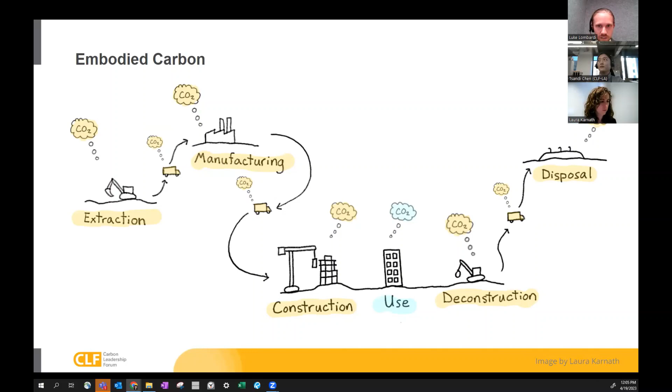Our first speaker is going to be Marcus Hopper. He's an influential figure in his role as the Northwest Regional Design Management Leader at Gensler in San Francisco. In 2018, he was part of a research team that aimed to bring awareness to the circular economy and identify how the industry can bolster a reuse process within design work. Findings were published in the Gensler Research Institute white paper, What is Old is New Again, Circumnavigating the Circular Economy. He's also a prominent member of the All for Reuse group.

Then we got Daniel Kietzer, who is ecosystem growth leader at Rheaply. He's based in Austin, joining us today from DC. He has over 10 years of experience in both the for-profit and nonprofit sectors, designing and leading impact-focused circular economy and sustainability programs. At Rheaply, he's working to scale their online material marketplace around the country, including Texas, Tennessee, Michigan, Ohio, Washington, and soon to launch in San Francisco and the Bay Area, which is really exciting. Rheaply is also partnered with numerous local municipalities and doing work at the federal level in DC, all around circular economy principles in the built environment.

Okay, everyone close their eyes while I get my screen shared. Let's see here. Oh, hey Luke, I think you have to stop sharing for me to share. Okay, there we go, thank you. Alright, a few more minutes. Okay, is everybody seeing the presentation screen, Luke? We just see the PowerPoint. Looks good, perfect, okay great. Alright, hi everybody, thank you for inviting me. I think you need to go full screen, by the way. Oh yeah, you're not seeing it? We see a PowerPoint full window, not the full screen. Okay, this should work, do you see it now? Yep, perfect, okay great, got it to work.

Well, thank you everybody for having me join this webinar. I'm really, really honored to be here with Daniel, Luke, and Jorie. I'm going to set the stage, and I'll go through this really high level. It's not going to get into the specifics because I think this group is well educated around embodied carbon. But I'm going to set the stage specifically around material reuse, and then some of the things that we've been doing here with others in the Bay Area. So I'll just start.

Just waiting for this delay. Try to switch the screen. Let's see if I can do this way.

I think the first thing I want to start with is a quote from one of my colleagues at All for Reuse. If you don't know about allforreuse.org, look us up. We're a bunch of design professionals and construction folks looking at how to change how building material reuse is viewed. One quote that Andrew Ellsworth from Doors Unhinged made was that building material reuse is really where carbon and waste meet—it's this really interesting intersection.

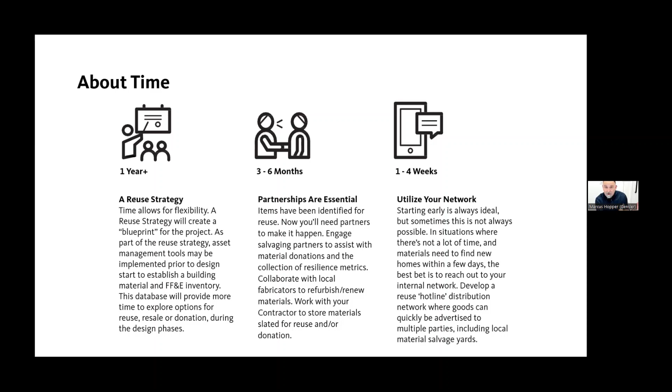The 1 to 4 week time frame is really this kind of hotline. During the twists and turns of the process, you're going to have your hotline of folks you call. It's not always going to be perfect. Even the most perfect reuse strategy or blueprint may have some holes, and that network you develop through your partnership list will be essential as you navigate and move through the process.

Working together in the Bay Area, we've developed an alliance, the All for Reuse Alliance. This has been a group of folks coming to the table from all different perspectives. We have folks from the Department of the Environment speaking from a policy side in San Francisco, folks like myself in the design industry, people coming from construction, and people from the public sector.

It's been a really interesting conversation about how each of these pieces plays a part in this overall ecosystem. So there are really three things the group is looking at: environmental impact, like where can we reduce carbon and waste; the enterprises piece, the workforce, can this generate jobs and where; and then we're also looking at scaling it up.

When people think about material reuse, maybe in the past it's more like, hey, we're going to put some reclaimed wood on a wall - that's great, it's more of a finished material. We're looking at scaling it up to the point where it just becomes a normal thing that we use in our projects.

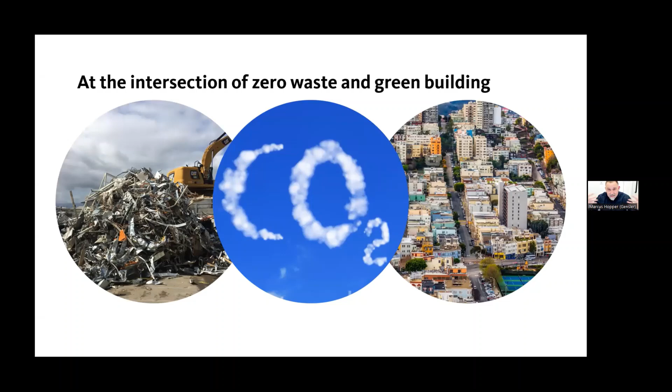Talking with the City of San Francisco, the Department of the Environment has also been looking at this from a policy side. There's this interesting intersection, similar to what Andrew had talked about in his quote, between waste and green building - that's where carbon meets in the middle.

So they started looking at this as a city, as their Department of the Environment, because they are looking at developing policy. Policy is going to be key in moving some of this forward, creating those incentives. So they started to look at the system, where can we start to intervene in the typical traditional system. What we're showing here comes from the Department of the Environment, the typical process.

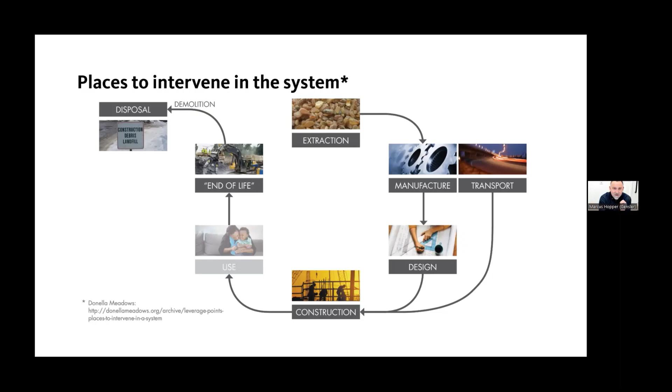The extraction, manufacturing, it goes into design, we're specifying, it goes into construction, into end of life, disposal. And so they started to kind of spider web it, right? It's like the crazy person with the pins on the wall and the yarn, and they're kind of connecting all the pieces.

And so they started to look at areas in this kind of workflow where they could intervene, like where could we start to pull apart and stick in things that can help with this material reuse idea. So what we were asked to do early last year, Gensler, we were joined by the Reuse People.

Which is a local nonprofit. Madrone is a demolition contractor focusing on sustainable demolition, and Stop Waste. We were asked to really focus on this recovery resale piece. Let's just look at the materials that are coming out. How can we start to create the demand there?

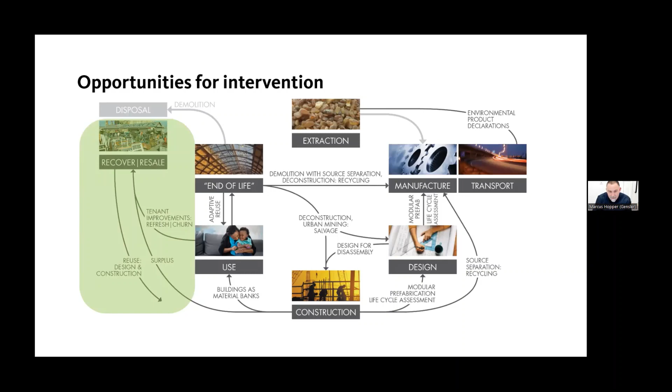The city needs this for policy, right? As they develop policy, they have to complete the whole picture. Before you put policy out in the world, you have to have somewhat of an operating system for it to be successful. And so they're looking at developing this network for suppliers and receivers, making that public to the folks using it within the jurisdiction.

The virtual asset management piece, which Daniel will talk about in a minute, and then this physical laydown space—where do the materials go? They can't always be just-in-time, stored on site. When purchased, they may have to go somewhere, like in escrow. Where do they go?

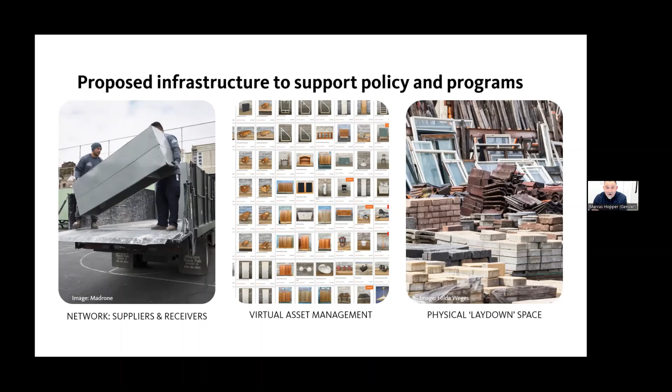The virtual exchange is very important, and I won't get into too much depth because Daniel's here to talk about this, but this is really the first step. It's like just creating visibility, showing people what's out there—what are all the materials that are currently existing out there, making it visible.

The next piece is really where our team dove into. This was an 8-week study, really, really fast. Really looking at the actual storage of it—the materials, and where are they going to go. How would this work?

And so this tied into a larger concept that the city was talking about and working on, called the Building Resources Innovation Center, or BRIC. The vision of it is really simple. It's really looking at this kind of flexible system—a system that can be relocated, a system that can be replicated—that can really enhance the building material reuse within the commercial construction market.

And so the concept is really 3 parts, right? We're really looking at trying to streamline the process—where can we help push it forward. Looking at how these sites or this system could really benefit the local community. Building material reuse is really local, and so there could be opportunities to help local communities.

This system—specifically in San Francisco, or anywhere in California—real estate's expensive. And so how do you design this system so that it can be, again, relocatable? Can it be designed around disassembly? It's there today, can be picked up and moved somewhere else.

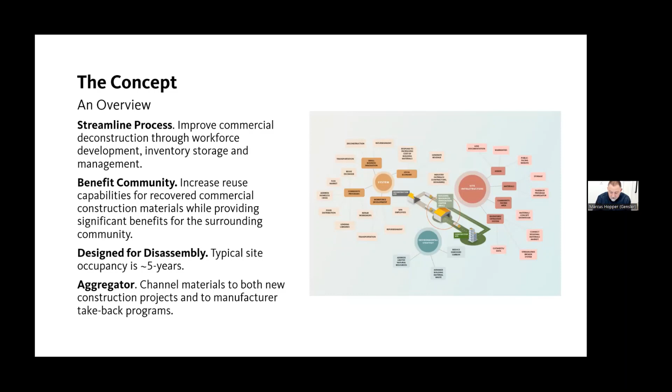It's based on a kit of parts, right? So the system would have 3 main parts. Site operations, which is kind of the heart of each site. Material storage, which is designed on a module—a module of a pallet and the clearances for a forklift. It would be weather protected. And then the community-facing piece, which is essentially the thing that makes each site very specific, because there are going to be various sites throughout, specific to each locality.

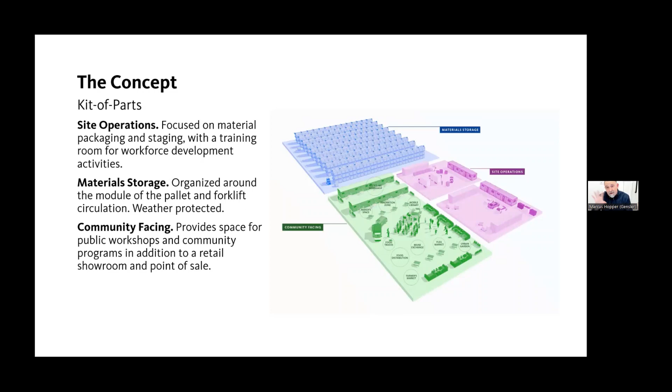So if we dive into the first part, which is site operations, this is kind of the mission control, right? This is like the home base. This is where stuff gets done. It has to be super functional, right? This is where the site operator, who is really running a business, will oversee this specific site.

We talked about the aggregators. So going back to functionality, it's a site that has enough layout space so when things are coming in, there's space for them to start to move the materials around. It's either going back to a take back program to go back to a manufacturer, moving to the retail side of the site, or going to a donation stream.

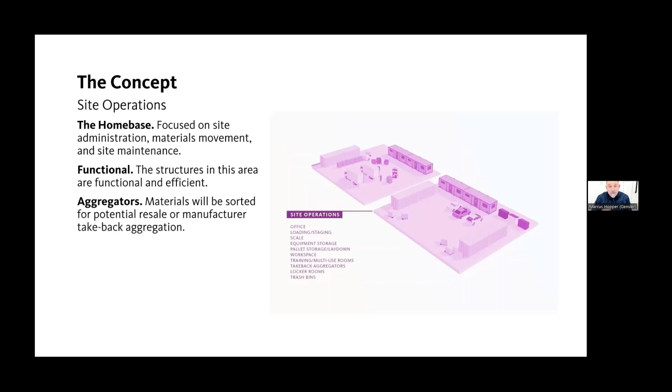The concept around material storage is interesting because every site would be slightly different, right? They're not all going to be the same site, size or shape. So really looking at this by material. When we studied this last year, we looked at materials coming out of commercial interior projects over the past 10 years. We went 10 years back. And so these materials listed here, starting with carpet, going all the way to ceiling tile, these are the top 9 materials that were coming out of projects.

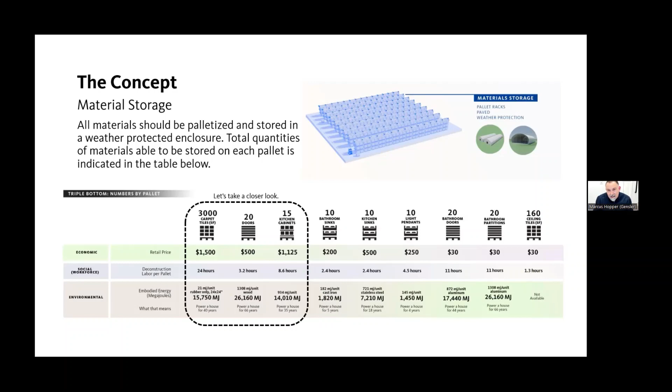So our team created almost a value matrix, looking at it through different lenses: economic, social, and environmental. We can take a closer look at those first 3, and I can dive into it a little deeper. As we look at the sites, say you're a site operator looking at what's the ROI on the site, how is it going to pay off. With a specific size of site, you're going to need to look at the materials from these 3 lenses.

On the economic side, take carpet tile, for instance, which is the first one. 3,000 carpet tiles stack, they're easily storable in a smaller square footage of area. From an economic standpoint, they could roughly bring in about $1,500. You have some labor hours associated with that. There's a lot of pieces and parts, so there's going to be more labor hours generated from that, which would be great. You're going to create more workable hours for people for employment.

And then in terms of the environmental piece, and this was all calculated by Ted Reiff at The ReUse People, in terms of embodied energy, you're getting almost 16,000 megajoules. So you can look at carpet tile, that's how much I'm going to get in terms of a retail side. I have a good number in terms of workable hours that I can employ somebody, and then I have a good kind of environmental impact.

If we move down the notch to doors, you're going to get less on a pallet, right? About 20 doors. In terms of value, about $25 a door for reuse. The workable hours in terms of folks on site—this doesn't incorporate the deconstruction piece from the site they're coming from, it's really just the number of hours on site—it's a lot less. The environmental impact, though, is much higher, right?

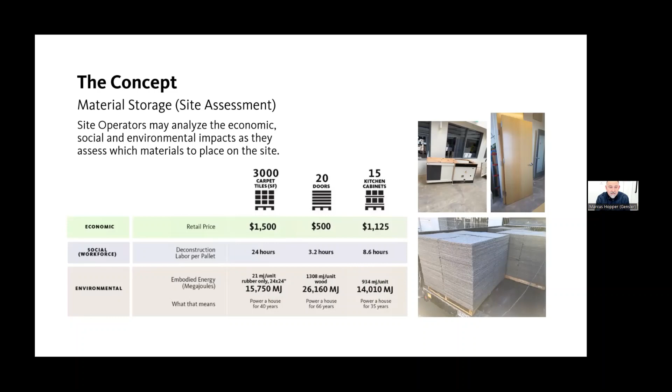The last piece was that community-facing piece, right? This is really important because every site being different, this is really how each site kind of shows its individual flavor. It's going to be the front door of every site. This takes it beyond kind of a material transfer station. This really becomes like the social side of materials.

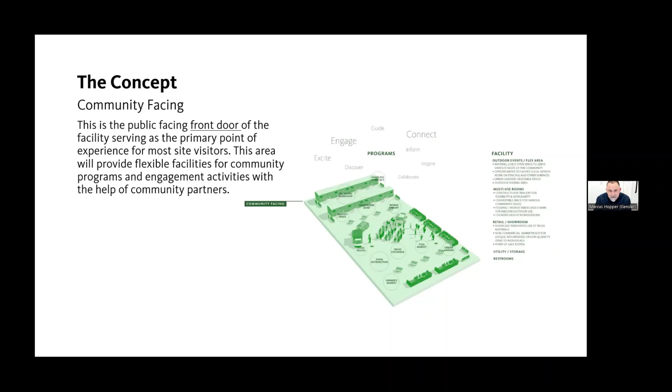And so, working with local agencies here, we were talking to the Workforce Development Agency. We were talking to folks involved in the art activation piece of it. Local design schools, California College of the Arts was involved. And so how do you start to create these sites as a place for people, not just materials? We were also talking to other nonprofits like the San Francisco Food Bank.

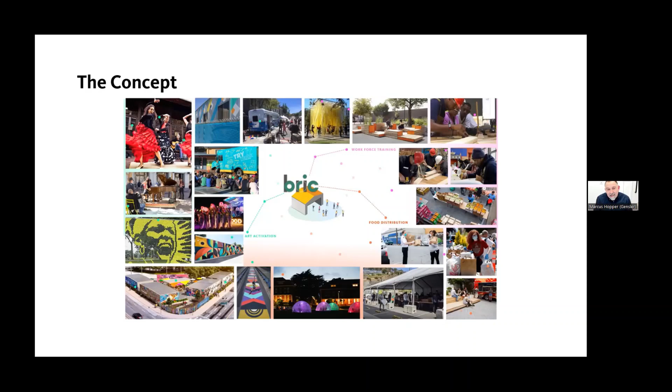They also have a need for collecting food and distributing it to the local community. This could be a site where they could do that as well. So we feel that bric is really an overall concept, not just building materials, and reuse can be a piece of it, but also a catalyst to help the communities that they serve.

The community facing, the site operations, and the material storage. But some sites will be smaller, and as you look at smaller sites, you're just going to have to readjust. That's where the matrix of materials comes into play - what are you going to choose?

So that gives you a quick outline. There's so much more out there, so I'll put these links into the chat. The first one is about the analysis, the more in-depth paper that the slides I showed you go into, like quantities and some of the calculations we found, like how we determine some of those pallet sizes and numbers.

The other piece is from the city of San Francisco, and a lot of the work they were doing - they did some extensive work on construction material surplus, like contractors over-ordering. Where does that go? Can we put it back into the market?

And the last piece is just some links for the All For Reuse site, some cool things our team has been doing. I think the ecosystem map that Yarden Harari from CRTKL put together is amazing. I'll also send you a link of one of her recent videos that she put out earlier this year.

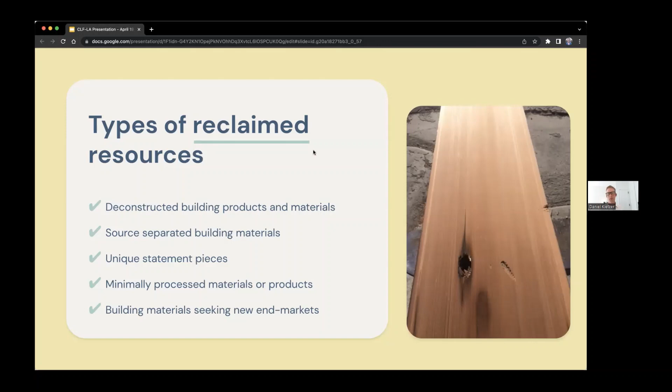So things like gypsum, ceiling tiles that weren't deconstructed nicely - those sorts of products we also want to take a look at to see if there's a way of building new systems that can put those materials back into new products.

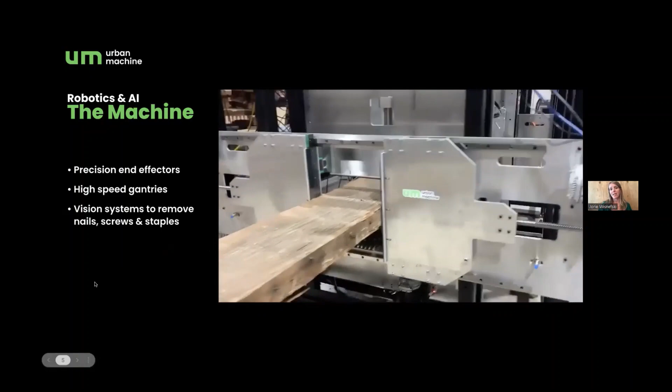So this is our robot. It is 80 feet of reclamation, all built modularly. The wood goes through these brushing stations that remove contaminants. It also polishes the metal, so it makes it easier for the cameras to see it and the AI to learn where it is. That flashing you're seeing is the cameras looking for it, learning what kind of metal is in it.

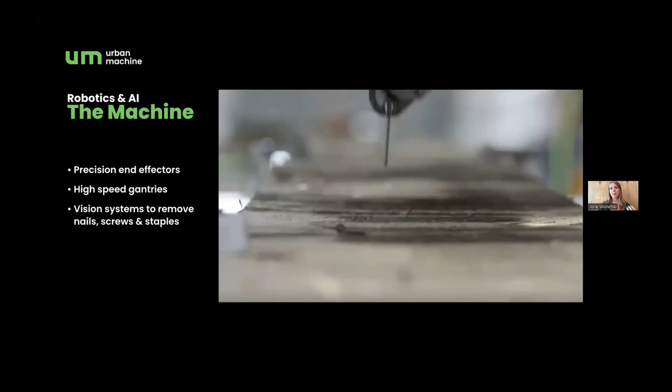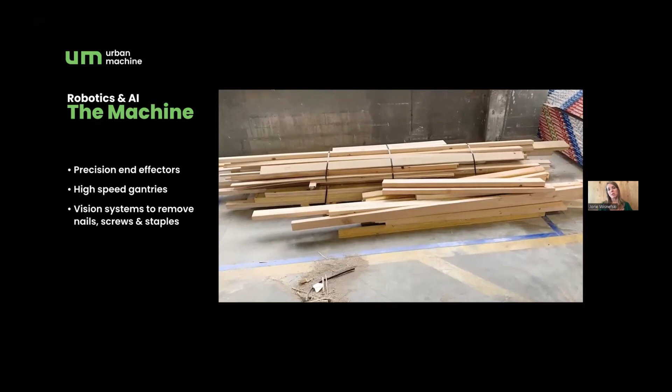And those bird beak looking pickers are on all 4 sides of the wood at the same time, getting all the metal out of it. And it goes through a final metal detector to make sure that wood is beautiful and ready to be reused in a project somewhere else, or right there on the same project, at the same place.

And I'm going to let Eric take over from here. Cool, thank you, Jorie.

Yeah, so as you guys saw, this is our 3rd engineering prototype that we developed here in the shop. Our first production unit will start rolling out the door here at the end of May for field trials.

So our machine is going to be portable. We're going to take wood from major demolition sites, this is our primary feedstock for our machines, and we're going to remove all the metal from it. And once it's metal free, then you can use it in architectural products like tables and furniture and wall facades and ceiling facades. You can use it interior, exterior, just like you do virgin wood, and you can even use it structurally.

We process 2 main types of wood. We process solid timber from 2x4s up to 6x18s, and then we also process glulam as well within those same cross sections. And it's everything from 6-foot long pieces up to 40-foot long beams.

And our core scope of work is just getting that metal out. Once the material is metal free, back into the wood supply chain it goes, and you can use it in your projects. And as Jorie mentioned, the quality of the material that we get is much higher quality than what comes out of the forest today.

So it creates a lot of beautiful elements. We get rough sawn material, going back 60 to 100 years, that we can use in projects. And it's great to be able to reuse this material and maintain that carbon in the building versus putting it in a landfill for slow release, or instant release in an incinerator.

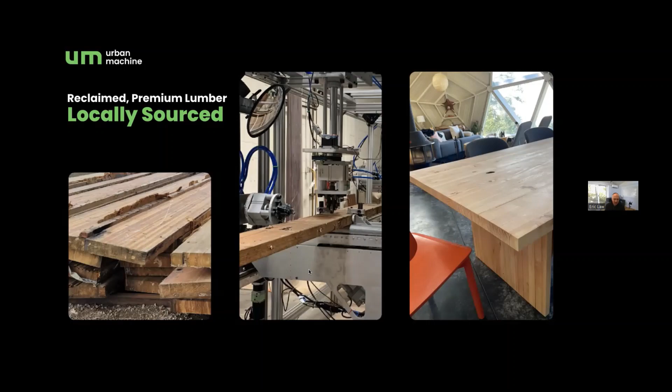So if we hit the next slide, yeah, there we go. So in the design world, how can you guys help, right? How can we change the industry? Because yeah, we've got the technology to make this happen, but we need 2 things to help out and to really drive towards reclaiming as much of that 37 million tons.

The first one is on the demolition process. As many of you have seen, the preferred demolition process today for demo contractors is to take an excavator and smash the hell out of the building. And the reason why they do that is the only financial incentive they have is to minimize cost. They're trying to make it small pieces so they can minimize the number of trucks to send it to a landfill. There is no large purchasing of lumber available today.

If you look at the demo sites, you'll see the demo contractors on your commercial industrial projects separate out concrete and separate the steel because they have reuse opportunities for both those materials. Unfortunately, they don't have any for wood. And so we want to change that. We're changing the economics by bringing down the cost to denail and clean up this material so it can go back into the supply chain.

And so what we're asking for the design community is to specify deconstruction. Now, a couple of things for you. If you've ever tried this, sometimes contractors will push back and say it's more expensive. Sometimes it is, sometimes it isn't. It really depends on the building you're bringing down.

For example, if you're bringing down a 1950s to 1960s warehouse with open beam ceilings and large spans, typically the cost is the same to deconstruct it as it is to demolish, because it's real easy to get to the material.

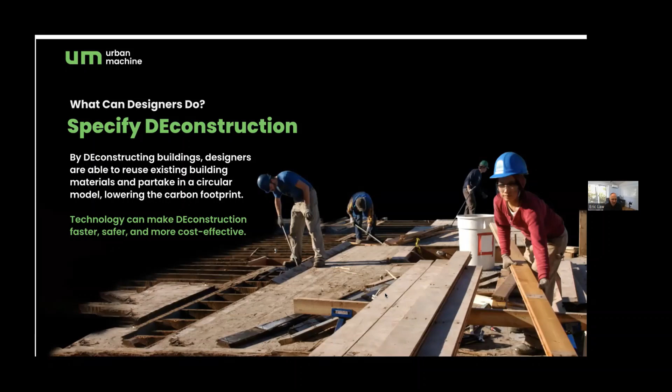The next task for you guys is after we reclaim that material, now we've got an inventory of material, how do we reuse it? So on the flip side, in your specifications, specify reclaimed lumber as a preferred material. The more people that specify it, the more material we recover, the more cost competitive it becomes with virgin. And that is our goal as the technology provider, is to bring down that cost for reclaiming lumber so it competes with virgin.

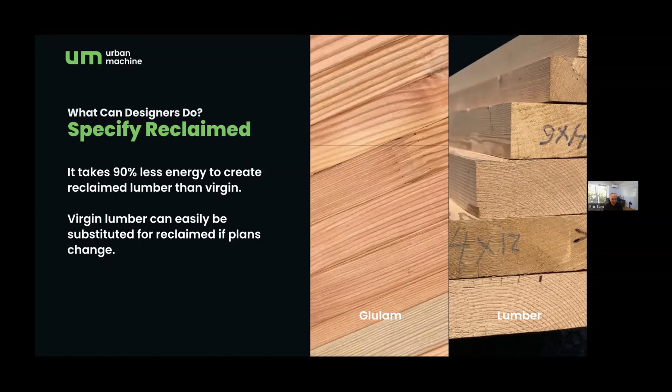This way you can have a locally sourced material. Imagine you're in the LA metropolitan area and you can get locally sourced reclaimed lumber for your project. That's a huge win on the sustainability front. It's not going to a landfill. There's no train to bring it out of the Pacific Northwest. Your trucking is very minimal depending on what you're going to do with it. And you're reusing a high quality product in your buildings. The other thing to note too is the lumber itself can be regraded, so you can reuse it for structural purposes. And it takes a lot less energy to reclaim than it is to construct.

And then the third one is, let's think about long-term. Think about in your designs, how do you take this new structure apart? How do you deconstruct it? Nuts, bolts, and nails are great fasteners. Please avoid the glues. Glue is really hard to separate because it actually permeates the wood. It bonds with those fibers and creates a really strong bond like it does in glulam.

But unfortunately, once you glue wood together, it's either got to be reused as is or it heads to a landfill. It can't be composted, it can't go into a green bin. Those glues are typically petroleum based. They're really strong, they build a great product, but we really need to use a lot less glue in our projects. The more screws, nuts, and bolts you use, we can undo those. Our robots can remove those. That's something that we can completely undo for deconstruction.

And so this third item is really that longer term objective. Over the next 100 years, when today's buildings start to get disassembled and reused, let's make them easy to take apart so we can reuse all those materials over and over again and not have to pull in virgin materials every time.

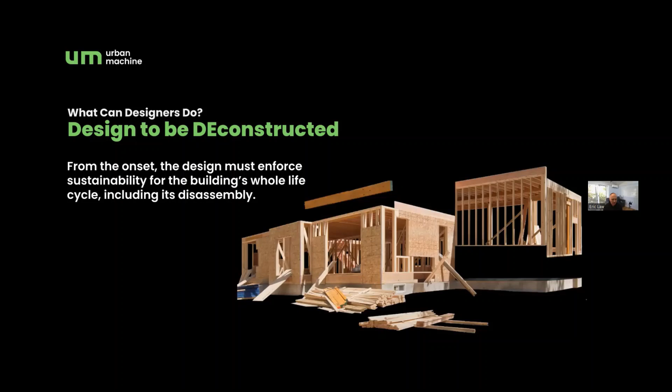This year, we're focused on Northern California. We're going to be going to demolition sites, C&D facilities with our machines starting here in June. We'll be sharing updates and stuff on LinkedIn and our website of those trips. And then in 2024, we're going to be building about a dozen systems and we'll start to expand. Our goal is to put one or two systems down in LA next year, as well as Portland, Oregon, Seattle, head up to Colorado, about six different metropolitan areas for 2024. Working with demolition contractors, working with developers, owner operators to clean up this material and get it back into the supply chain for the projects.

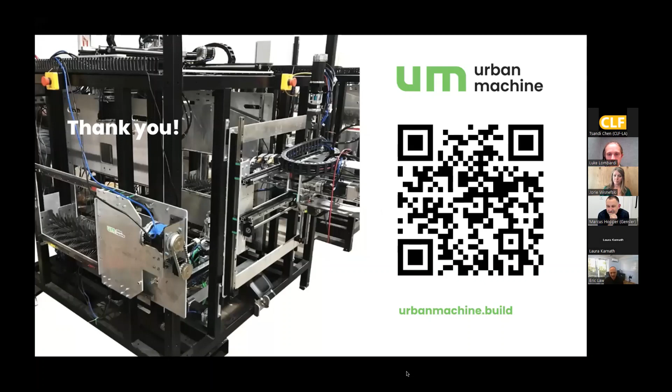If you have a link to that EPA study, I think people would benefit. Yeah, we can dig that up and share that with you guys. And so that's kind of how we come up with that delta on it.

In theory, the carbon stored in the wood in the buildings - the wood's going to dry and lose moisture content with age, but the carbon content should remain the same. The only time it would actually change is if the wood gets degraded - say termites get to it, water damage, you get rot or decomposition in the buildings. But we can't reuse that anyway. Once water gets to it or the bugs get to it, it's back to the compost pile.

Thank you. Okay, next question, we might have to do a little rapid fire here. From Khalid: how is the lumber industry responding to your idea for deconstruction and reuse? What's that interaction been like?

We were just up at the Mass Timber Conference in Portland, and they love it, because the big hole in the lumber green story is the circularity right now. Steel, aluminum, concrete have almost closed loops for the most part - energy intensive, but they're not going to the landfill. Wood doesn't have that today; the majority of it heads to landfills and incinerators. So this really completes the wood story and gives it that circularity.

Next, still sticking with Urban Machine: how does the regrading process work? It's the same process they do with virgin lumber - you can do visual grades, you can do mechanical grades. They will come out on a grader and grade stockpiles of lumber. So if you need regraded salvage lumber, it's just a matter of scheduling a grader.